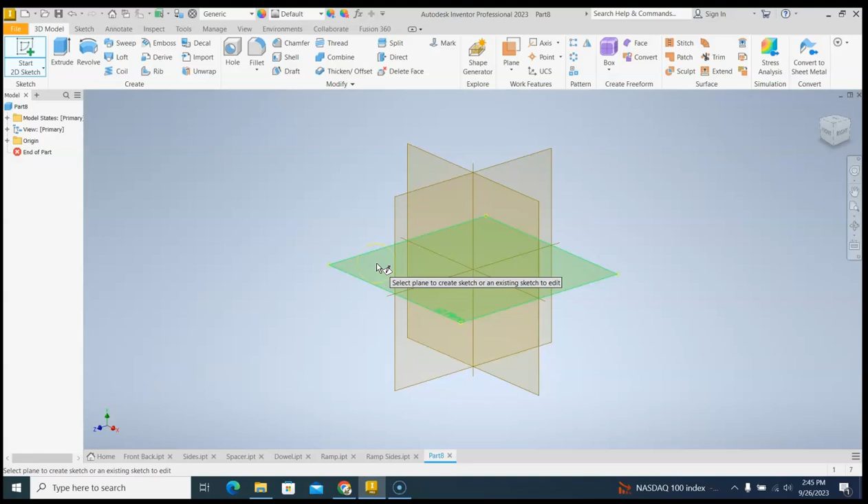Click on that. I'm going to start by clicking on the rectangle tool. Click, and I'll draw something kind of long and skinny like that. I'm going to click on dimension. Click on the bottom line. This will be a total of 9 inches long, and it is 1.5 inches wide, 1.5. Click on top. Let's zoom out. Let's see the thing. Okay.

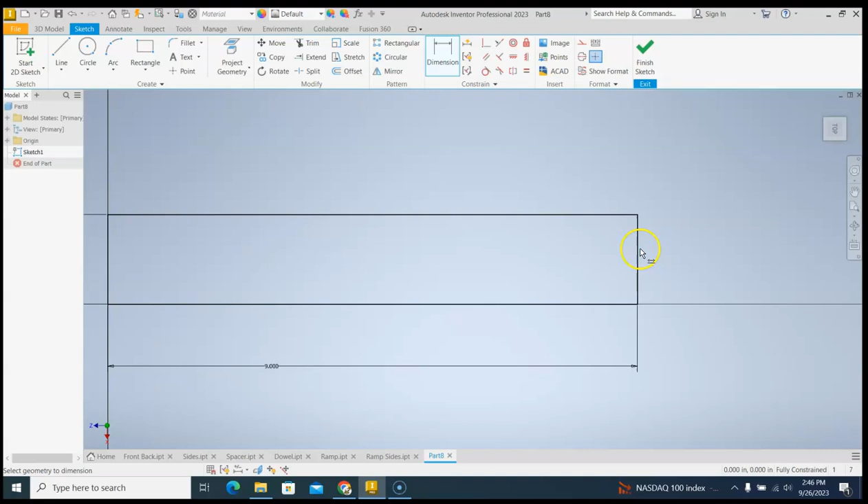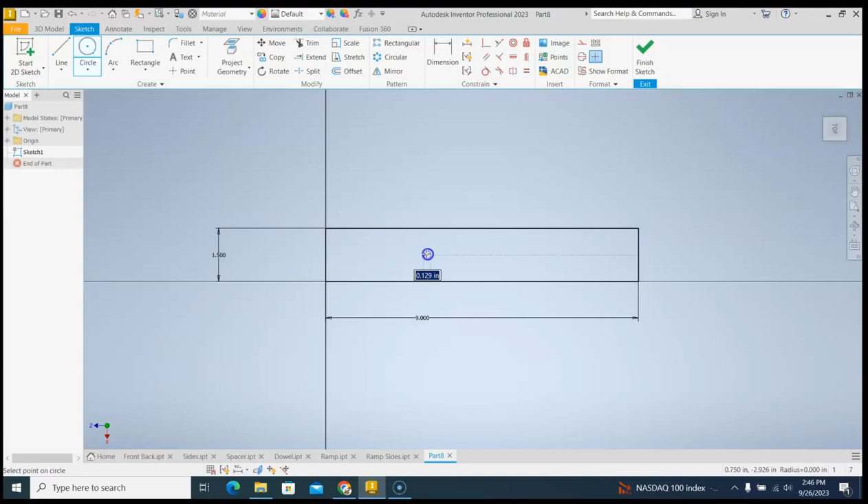Now what I'm going to do here, quick two things. We're going to drill the holes for the pegs later. But I am going to cut in the big circle in the middle, and I'm going to do the 2 notches on the sides first. If we go to the ends and we hover, and it snaps to green, that's the center point. If I come out, I'm in the center of my part. That circle needs to be drawn in the center. That will save us one more dimension because I don't have to dimension side

to side. So now I can click on dimension here. I can click on my circle. The circle we're going to be dealing with is 1 inch in diameter. Click on 1 inch, and I click on the circle. Excuse me there. And I go to one edge, and I click again. The circle should be 3.5 inches from one edge. Doesn't really matter if you pick the left edge or right edge. Since I'm drawing the video, just stick with the left edge the exact same way I'm doing.

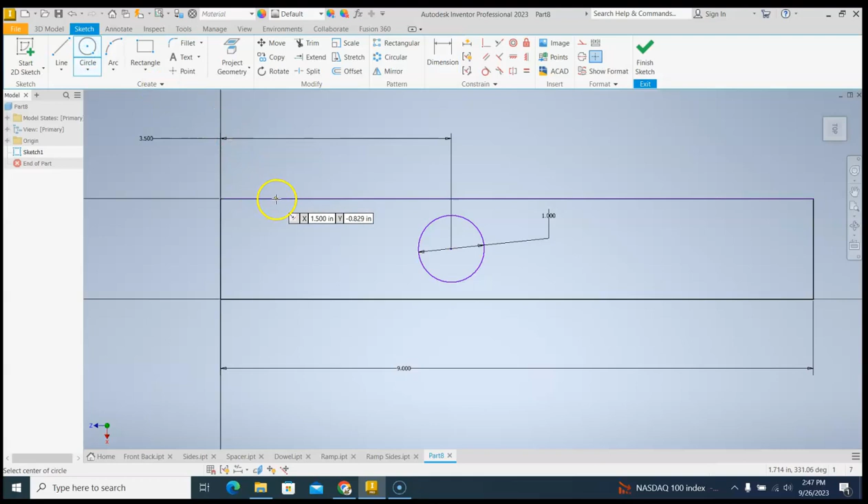3.5. Okay. We dimension to the center because we have that dotted line when we drew the circle, so I don't need to dimension side to side. It is centered in my part. The next thing I'm going to do is click on the circle tool. I'm going to just click on this line, draw a circle, click on this line, draw a circle, and we're going to make each one of these circles 1/4 inch.

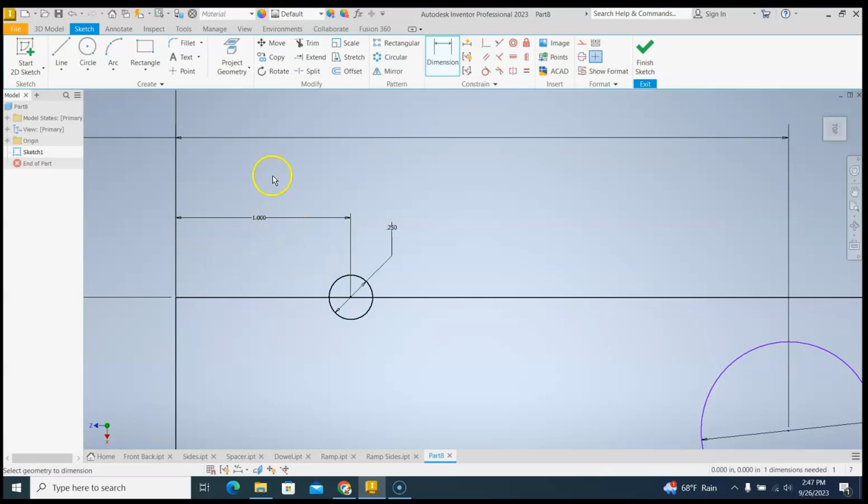So 0.25, enter, click on this one, 0.25, enter, and then I'm going to click on the circle, click on the end, 1 inch, enter, on the circle, the end, 1 inch, enter. And now we're going to click on the trim tool. I'm going to click, hold down, and drag, and it's going to trim those things off. Same thing here. I'm going to click, hold down my mouse, drag over, 1, 2, and there we have it.

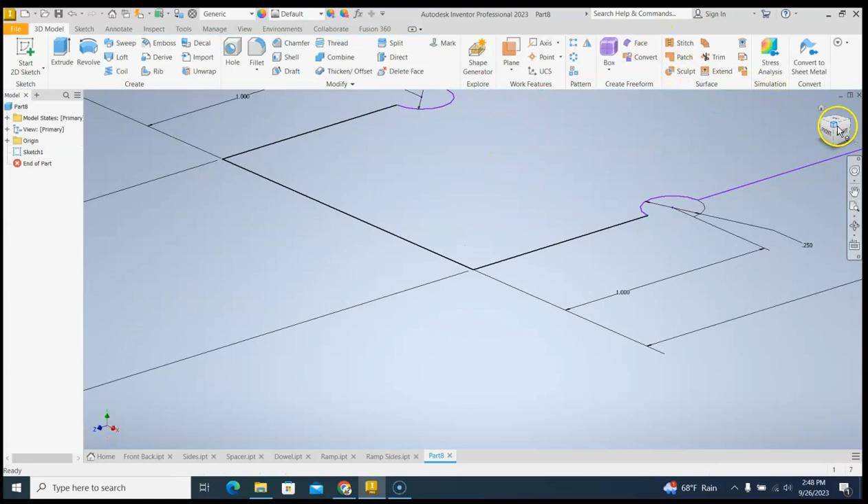Now I can finish my sketch. I'm going to zoom out. I'm going to extrude. I'm going to click on the middle, and this is going to be 0.75 thick. Click enter, and we have the base part of our drawing. Now, we have to add 2 other things. So I'm going to start 2D sketch. This time it doesn't give you the thing. I have to click on the top surface here, zoom out like so, and I need to add a point.

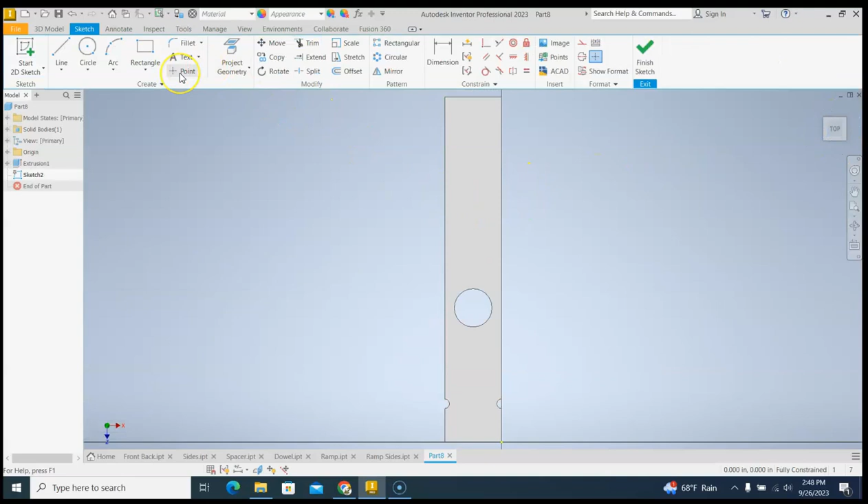Be careful. Once you click on the point tool, wherever I click, it's going to add a point. You only need 2 points. So I'm going to go up here to the center. I'm going to find where I get that green line. I'm going to come out. See, I'm in that dotted line. The purple dotted line is coming out there. See that? That means I'm in the center. I want that. Click, come down to the bottom, drag up, I have that purple dotted line, and click.

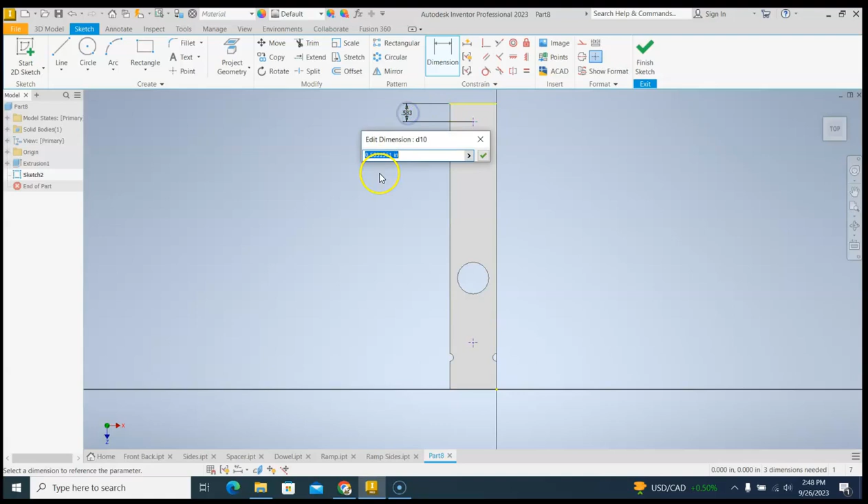Okay, now I need to dimension these. I don't need to dimension side to side. Don't click on the surface because you add an extra point and you'll have to delete that later. I'm going to click on my point. I'm going to click on the end of my circle. Right now, you'll notice I am on the side that does not have the little notches for the hand grab and the big hole. That side needs to be 0.375 from the end. Enter. This other side that is by the hand grabs and the big hole, click on it, click on the end. This is 1.375. Enter.

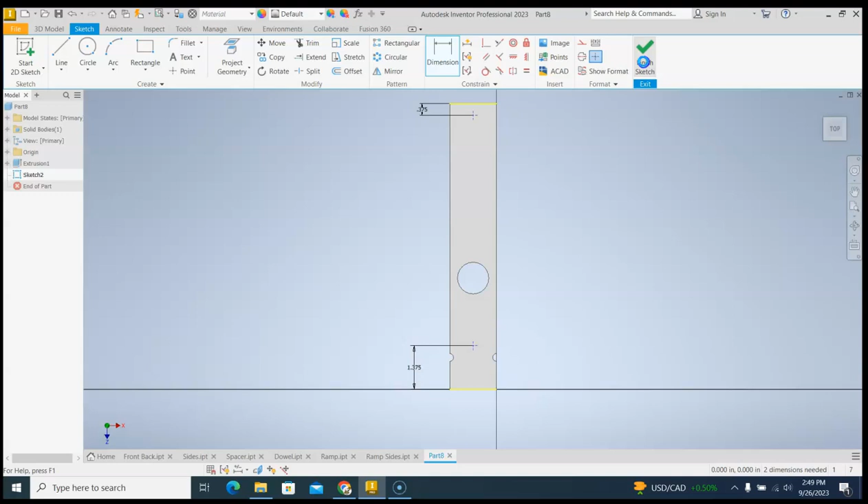Okay, we finished the sketch. Now I'm going to use the hole tool here. I'm going to click on the hole tool. Immediately it's going to make this hole thing. I'm going to go through. I want a simple hole. I do not want a countersink. I want no seat. We want to go with a distance for our termination, and it's going to give us this fancy little graph thing here. We want our diameter circle to be 0.25, and we want the depth we're drilling at to be 0.375 to the center. Okay, then all we got to do is look over here.

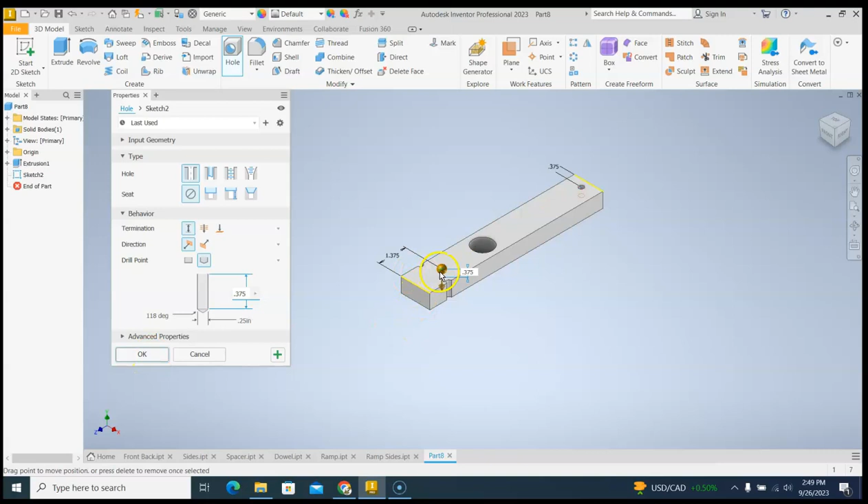We can see that there and there are both highlighted as if they're drilling a hole, and I hit OK. If you have extra points, you'll probably see multiple holes there, and it will give you holes for multiple points that you don't want. Make sure you just have the 2 points. That's all you do for the slider. File, save as, slider. And if you're following along, that should have been the final drawing you have to make. After that, you'll start working on the assembly, which you'll watch in that video.